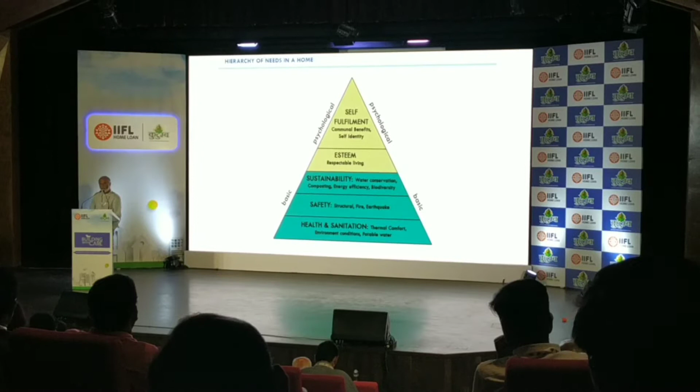The basic needs to be fulfilled when we build our homes or when we go to live in a new home. The basic needs being health and sanitation and safety. And of course, the assurances of what I call environmental requirements: water conservation, energy efficiency, and greenery around you. This environmental security is an essential need. If in the process of building we don't provide environmental security, then we are compromising our future. And this is basic need.

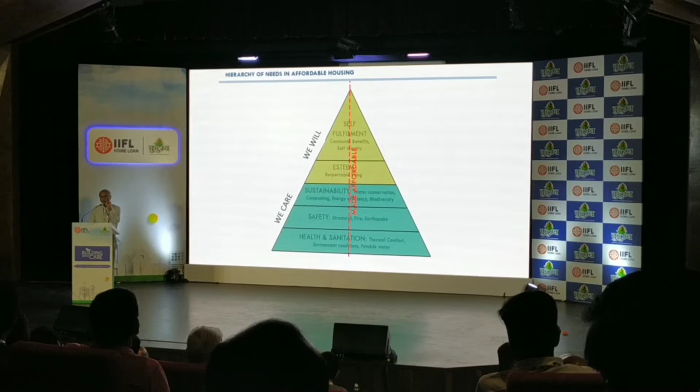But we need something more than that. We need, through the process of building and living a new life, a growing self-esteem and eventually self-fulfillment for all members of society. And let us say that providing sound homes for living in is this journey, making this a possibility. And making it a possibility at an affordable price today is our challenge. This is the work that we are really engaged in.

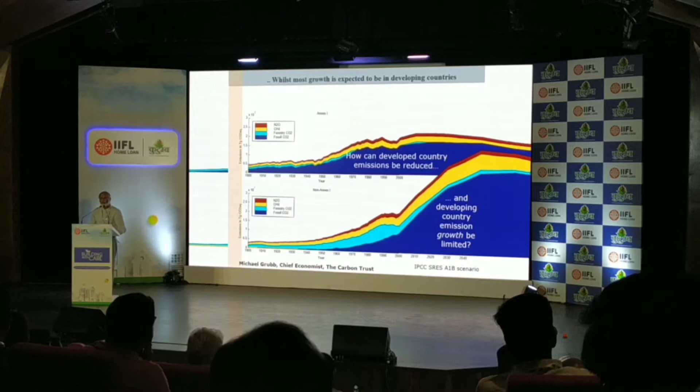Well, we had a glimpse of it in Monu's presentation just now. At the rate we are building in this part of the world, or in China, or in Nigeria, at the rate our populations are growing, at the rate we are building in cities, we as a nation are going to be a significant contributor to climate change, which is already on its way. So we cannot run away from this responsibility.

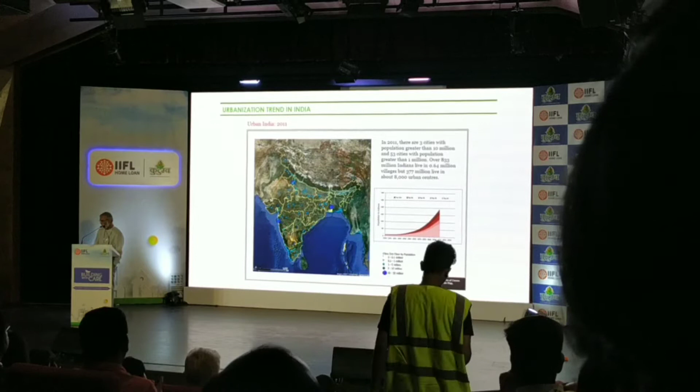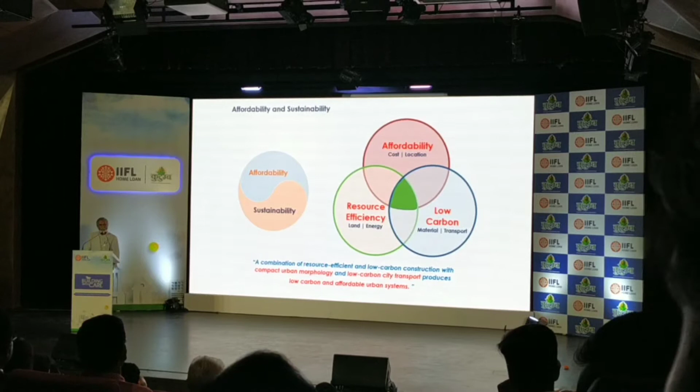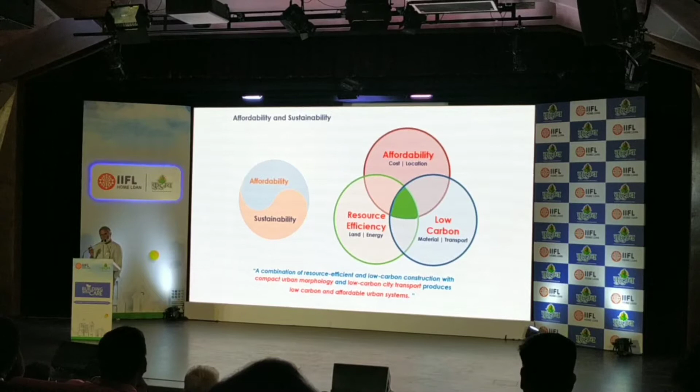And most of this is happening in our cities, dotted across the entire subcontinent, as you can see here. And these cities continue to grow. They become bigger and bigger. And the bigger they become, the greater the environmental footprint human habitation is going to have. I believe that to be affordable is only possible when you are sustainable. And if you are sustainable, you are likely moving towards affordability. I hope this will become clear as we move on.

Not only do we have to be efficient in the use of our resources, material resources and financial resources, not only do we have to produce buildings in a manner that produces less carbon emissions, either in their construction or in their operation, we also have to make sure that all of this is done at a price that our buyer with incomes less than 40,000 rupees a month can afford to pay. The green triangle in the middle is the zone of solutions. Just keep this diagram in mind.

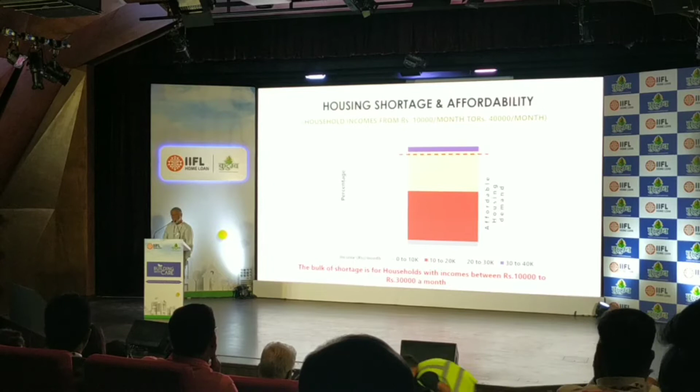Statistics have now made it very clear that most of the housing demand is in the low income sector. Most of it. The bulk of shortage is for households with incomes between 10 and 30,000 rupees a month. And if you scan the landscape of who's providing homes, you'll find that the big developer is not providing homes for this category, not at the moment. Self-build is also not going to do enough for it in the cities.

It is the medium and small developer in all the second, third and fourth tier cities, including the peripheries of the large cities, that is going to play the central role in overcoming this challenge. You are in the center of the growth of the nation. That's the point I really want to make.

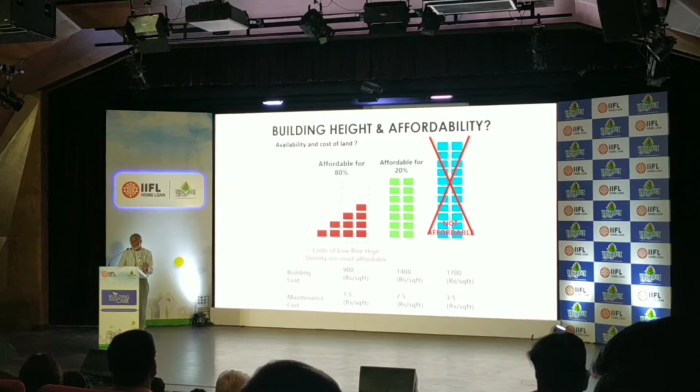Something else that's happening in cities, and it's a subject for Mr. Suresh, since he's over here. They say land is short, and so you have to go taller and taller. But we all know, it's common sense. As you build taller, you spend more. As you live taller, you spend more for living. Your costs for maintenance of the building and the operation of buildings go up. Lifts, pumps, maintenance, so on and so forth, just become more expensive. So actually, not only is tall building unaffordable to build, it is unaffordable to live in.

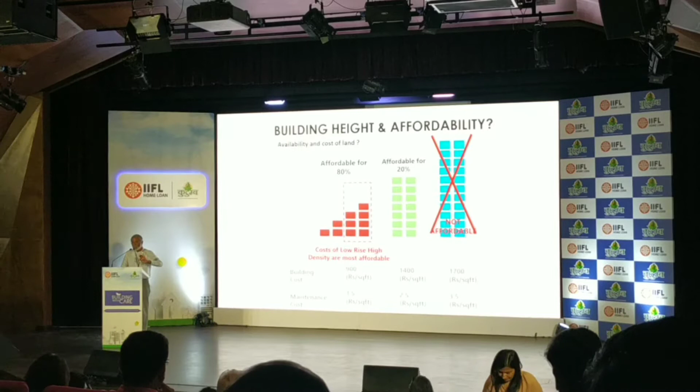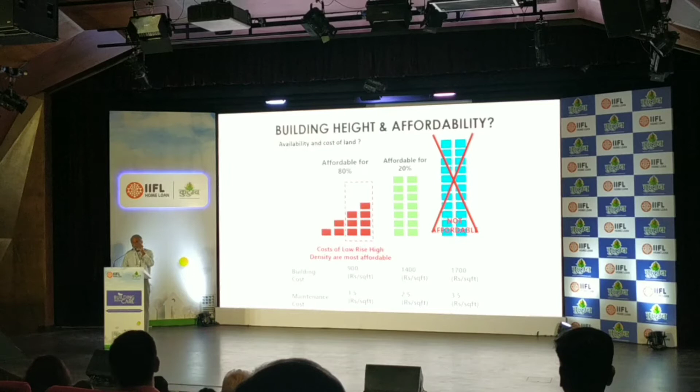And this is something that we have to really convey to our planners and our policymakers. Don't push the cities into a state where only tall buildings are possible, because if you do that, 80% of the population will not be able to afford to live in the cities, and that's no way of living. Most affordable is 3, 4, 5 stories high, and 80% of our citizens can afford it.

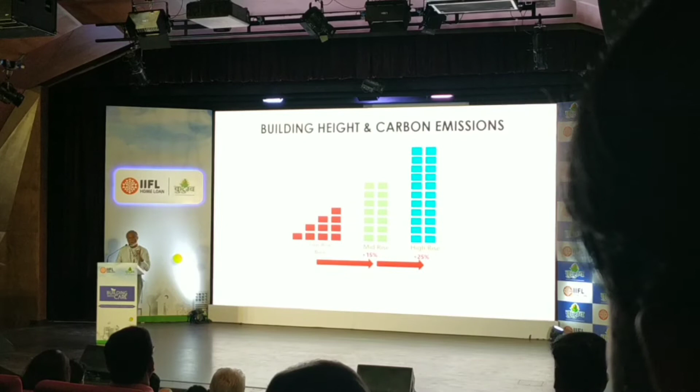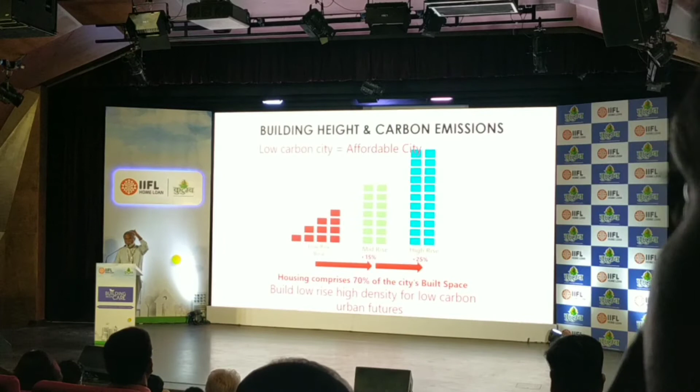We also find that as you build taller, you consume more electricity in the operation of the buildings. As you grow taller, you consume much more steel in the construction of the buildings and other materials that cause a greater emission. They have greater embodied energy, therefore cause much greater emission of carbon. So, to build low is economical, not only in money terms. To build low is also more environmentally friendly. Sustainable is economical. Sustainable is affordable.

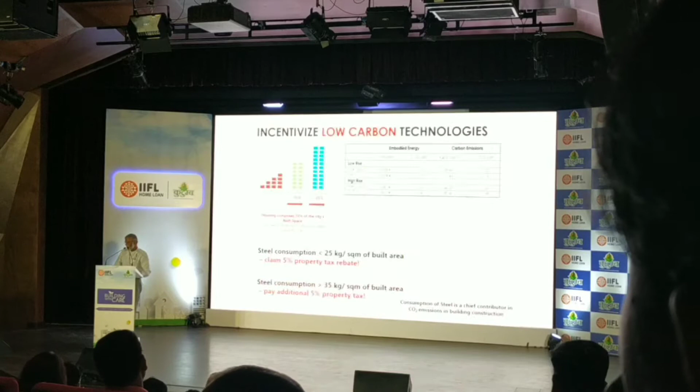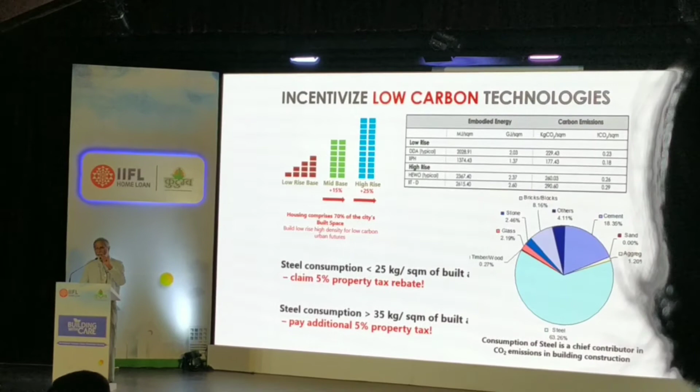We found that approximately 60% of the embodied energy of construction, that is, the energy used in the production of materials for the construction of a building, 50 to 60% is attributable to the consumption of steel in the building.

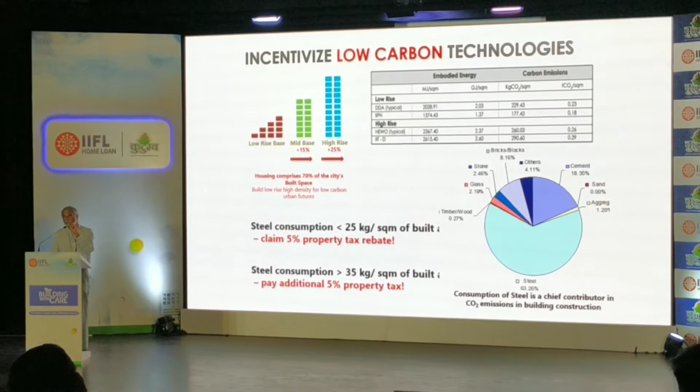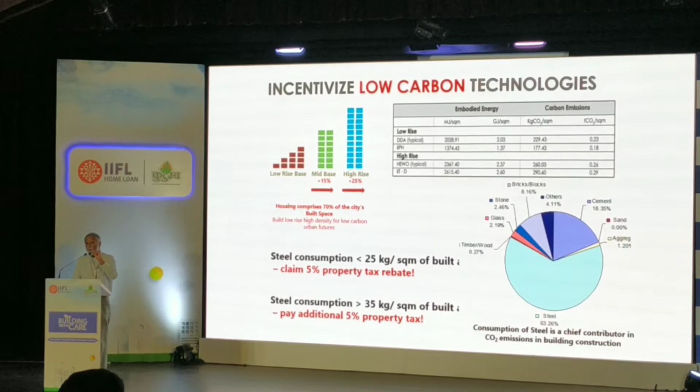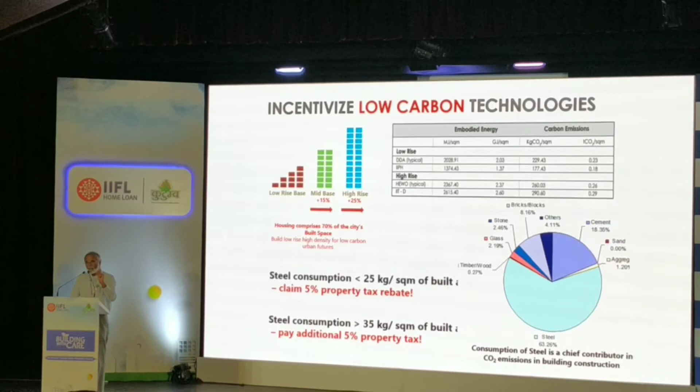What we found, even if you're designing for earthquake zone 3, up to 4 or 5 stories high, you can manage at 25 kilograms of steel per square meter of built space. 25 kilograms, if you do careful design. But what is the norm in industry? 3.5 kg per square foot, they say. If you go taller, it becomes 4. If you go taller still, it becomes 5. But keep this target in mind. Intelligent structural design and configuration of building can do much less harm to the environment because you can design it with less steel. 4 to 5 stories high gives you the best results.

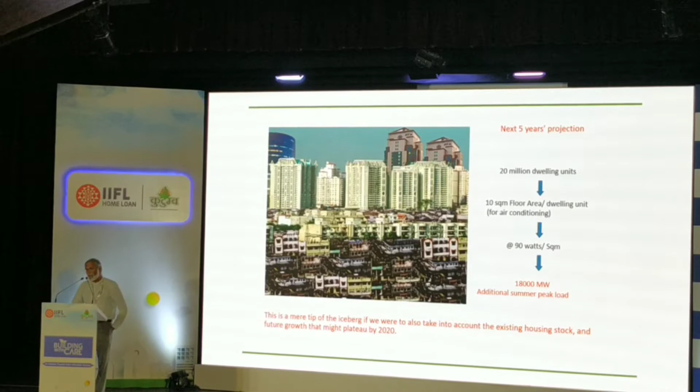So that's about embodied energy, very quickly. Another thing, as we go into looking for better comfort in the home, even if I'm moving into a home today which has no air conditioning, 2 or 3 years down the line, at least one room is going to be air conditioned. Maybe it won't be used all the time, but sometimes it will be used. And then 10 years down the line, maybe more air conditioning will be required. At least I look for air conditioned comfort, if not for air conditioning, right?

So what do we have to do today? Even if air conditioning is not going to be assumed to be a part of the building, we have to design in such a way that the need for air conditioning in the future is reduced. Because if you don't do that, and as you continue to increase the construction of buildings at such an enormous rate, you're going to ask for so much energy just to meet the air conditioning demand of our urban living.

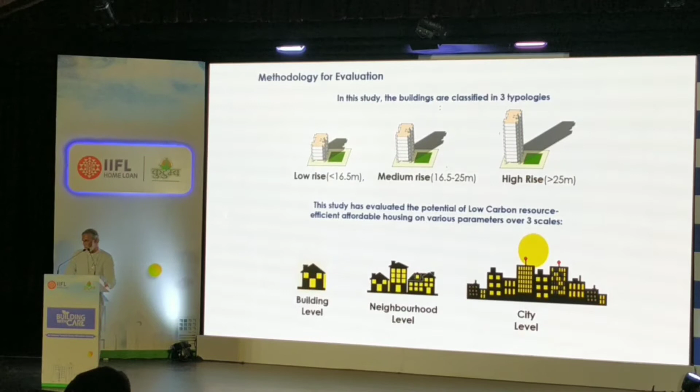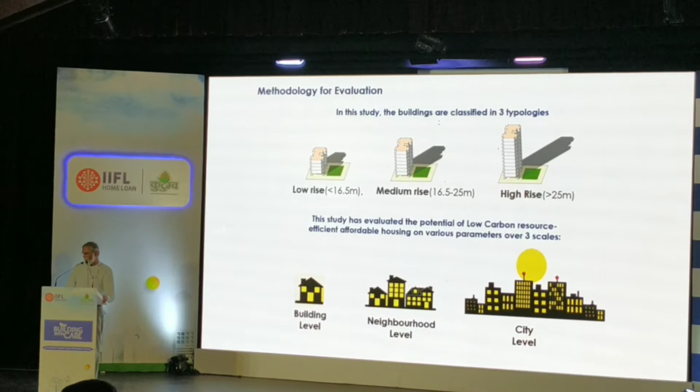So we did this survey to establish that in middle class homes, progressively, 60% of the bill of electricity is attributable to air conditioning itself. 60% of it. You could go to any part of the country. We did a comprehensive study of 4 to 5 story high housing, 8 story high housing, and then taller housing, with actual data taken from buildings that have been built. And we came to this interesting conclusion.

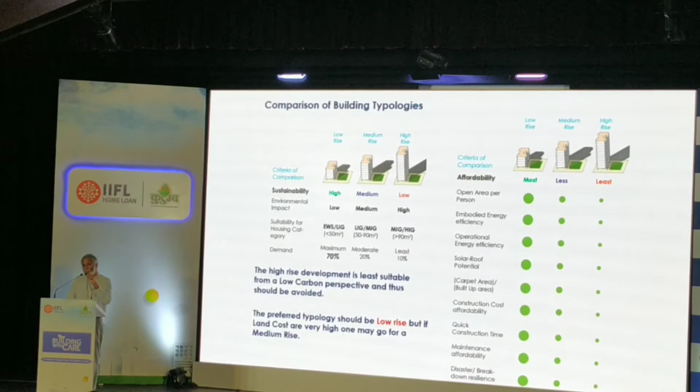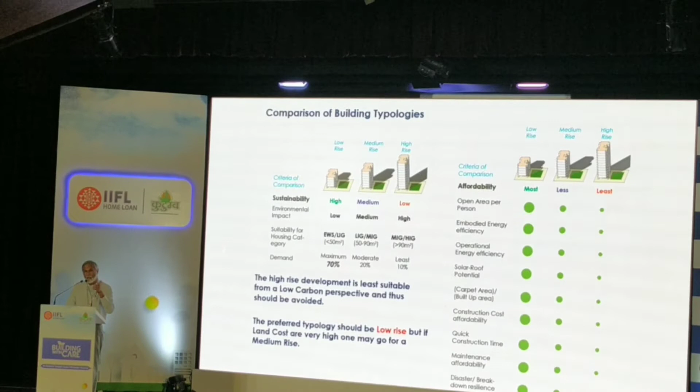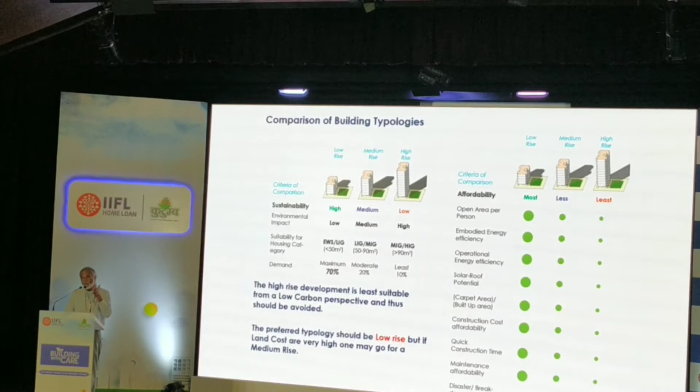We found that in the overall development, if you consider the terraces and the balconies as also accessible open space for the residents, you get more open space per person in affordable housing if you are 4 to 5 stories high, and you get less as you go taller, and even less as you go taller still. So open space provision, which is an integral part of the home environment, actually improves even when you achieve the same densities. Embodied energy of 4-story housing is 30% lower than 8-story housing. Operational energy is much lower still. It is about 20% of a tall building.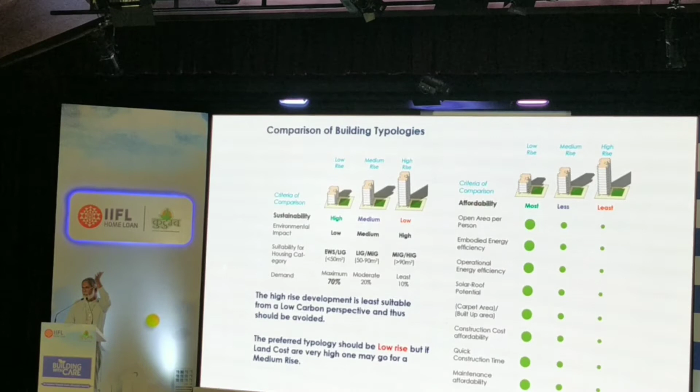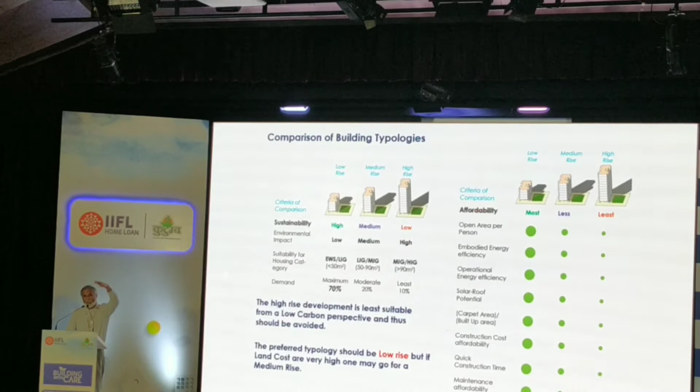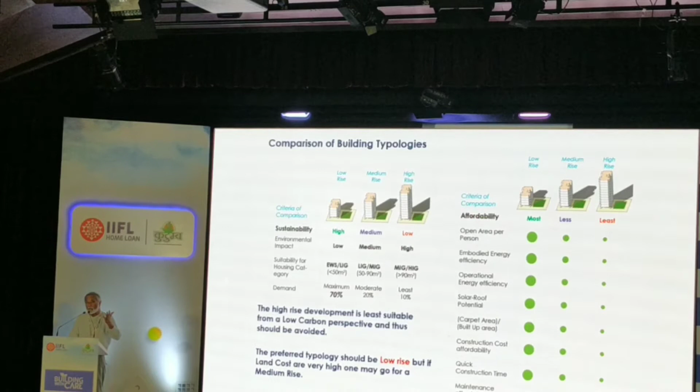An incredible possibility that has arisen is that if you build 4 stories high, you've cleared the roof line. You've cleared the tree line, just at the tree line. That entire roof is now available for you for solar photovoltaics. As the government program and the technology and the financing structures, business models for solar photovoltaics become more and more accessible, what we have found is 85% of the energy demand of simple living in 4 stories is met by the sun falling on the roof on an annual basis.

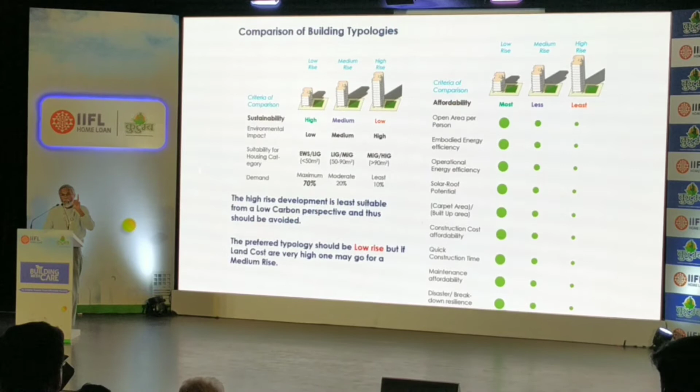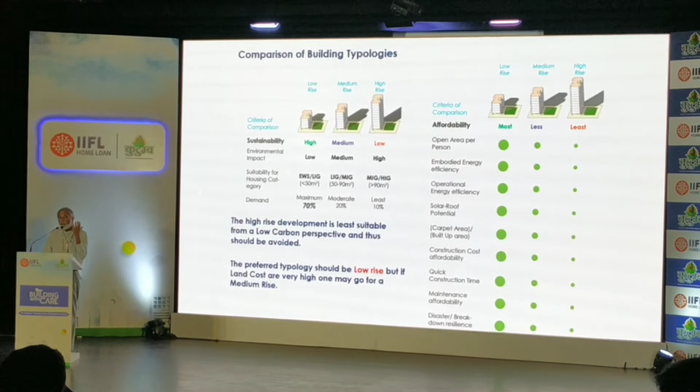You can truly go towards net zero city life if you stick to 4 to 5 stories high. If you go 8 stories high, that potential drops. If you go 12 stories high, it will never be achieved. So if you're talking about cities of the future that are free of carbonaceous fuels, this is where the solution lies.

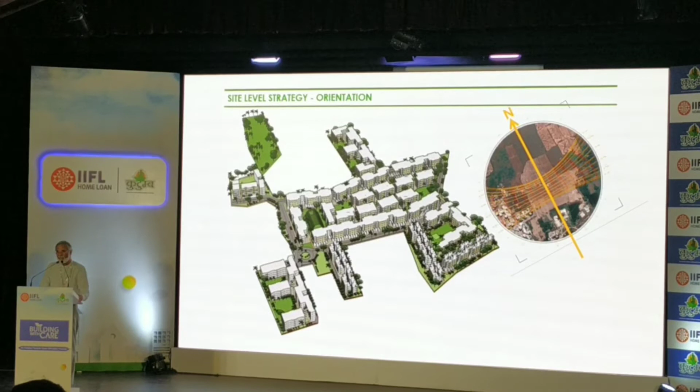Simple things about which way the houses should face. Don't face them directly into the sun. Don't face them directly into east and directly into west as much as possible. Keep the heat out.

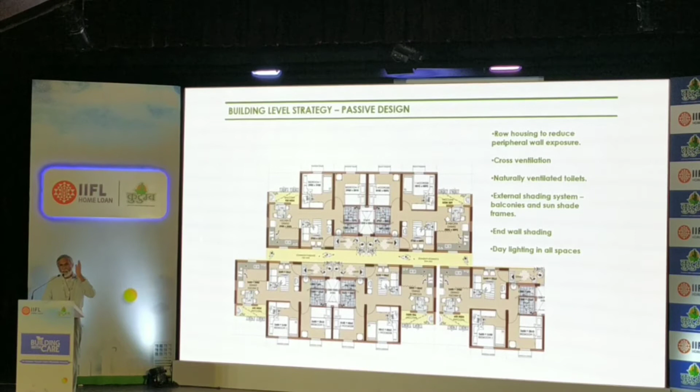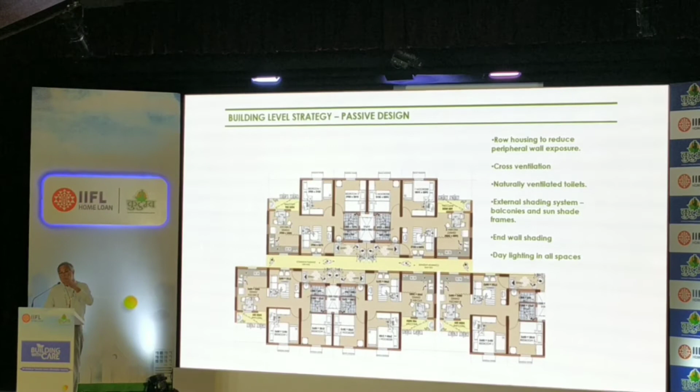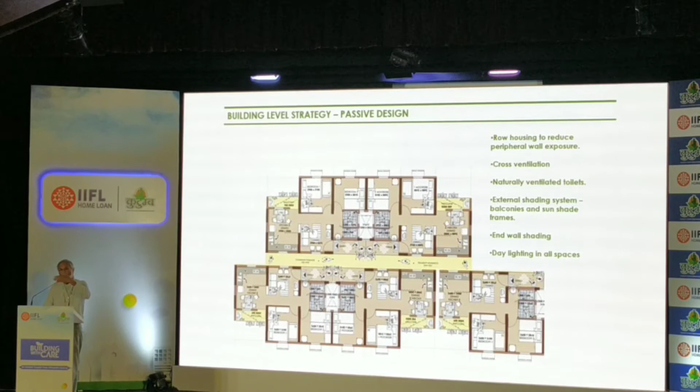Build in such a way that the external wall area of the building is limited in relation to its plan area. Use a row housing principle or similar principles of design. It brings down not only the construction cost, it brings down the area of the walling on the external face, external finishing, right? Doors and windows, and the exposure of the inside space to the heat or cold of the outside. In every sense, it is more efficient. It is more environment friendly. It is also less expensive.

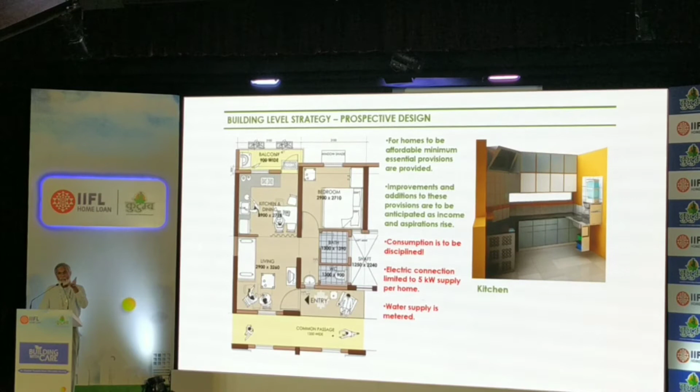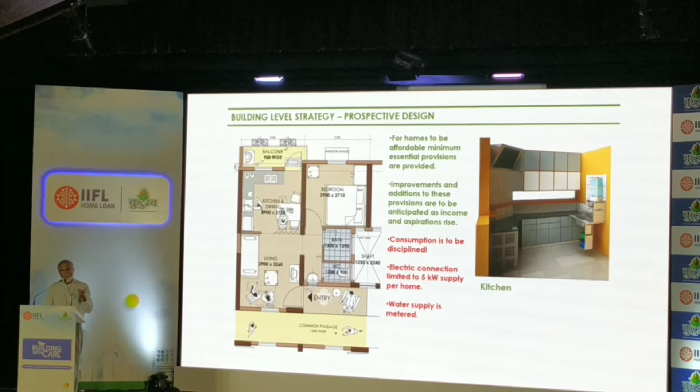And you can design in such a way that what you occupy today can be varied for the needs of the future. Again, very careful structural design can allow you to increase the size of a house by adding the neighboring house to your house, or the neighboring room to your house, or selling out your room to somebody who's a neighbor, etc. Because the structure is going to stay for 50, 60 years, whereas the internal living space is going to undergo change as incomes improve, family structures change. Make the buildings future-proof, and this can be done at low cost.

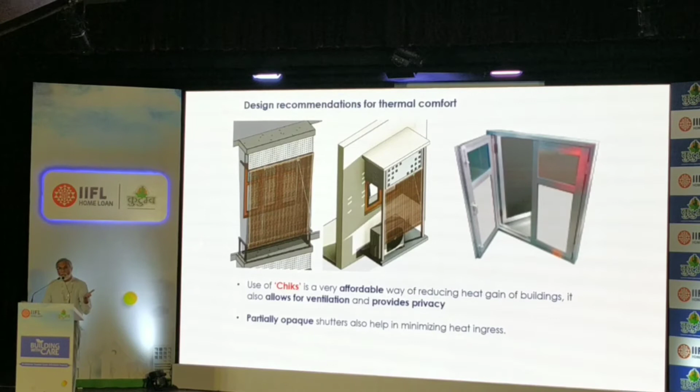Extremely important. Do provide for external shading. Stop the sun outside the window. Don't let it come in. If you're going to let it come in, it's going to heat up the house. Simple ways that you see. On the right-hand side, you see a very interesting solution.

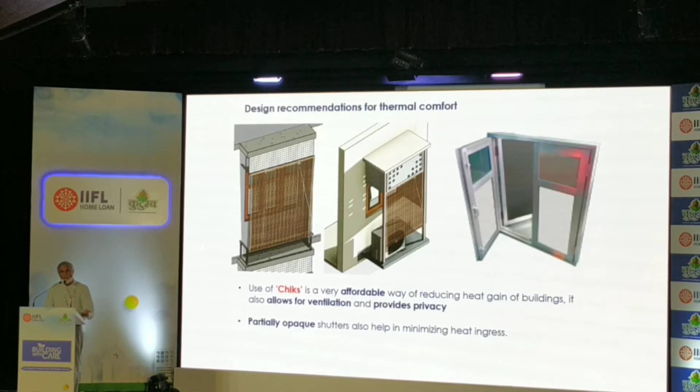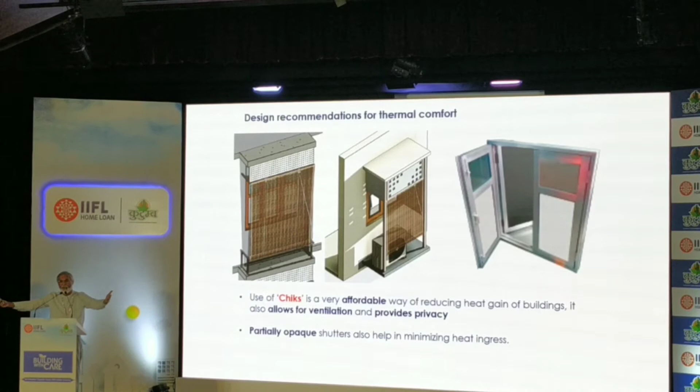If you go into the countryside, go into the old cities, the old days, you used to make windows out of solid shutters. And when glass came in, a little bit of glass came in at the top. When it is pleasant outside, you simply open the window, let in the air, let in the light. When it is very hot outside, you don't even want the sunlight. And there's enough sunlight outside when it is very hot for a little bit of glass to do the job. So, a simple way of shading and keeping the heat out.

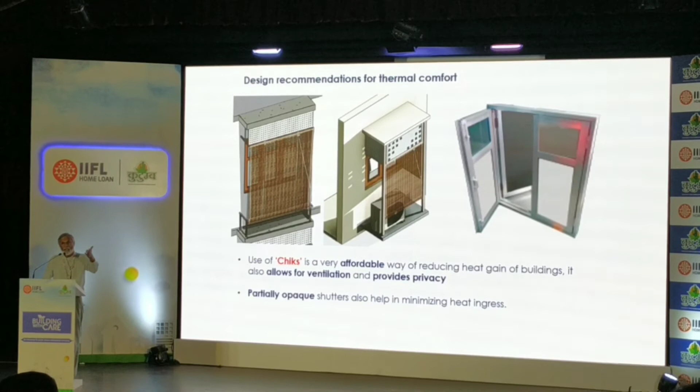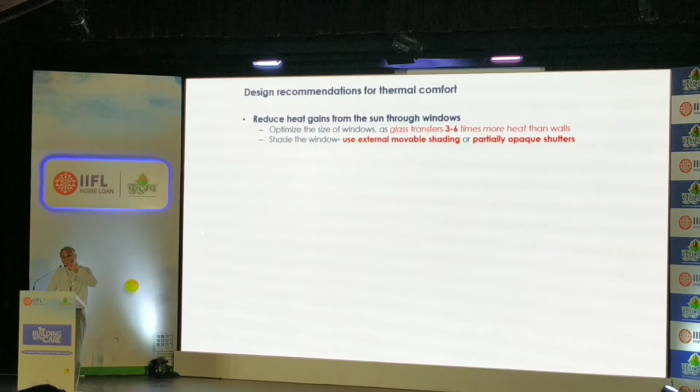But if you want more view and more contact with the outside for space or whatever else you might want, do provide an external shading system. Goes to balconies and to every other element which is open to the outside. So, very important, to reduce the demand of air conditioning in the future, reduce heat gains from the sun through windows.

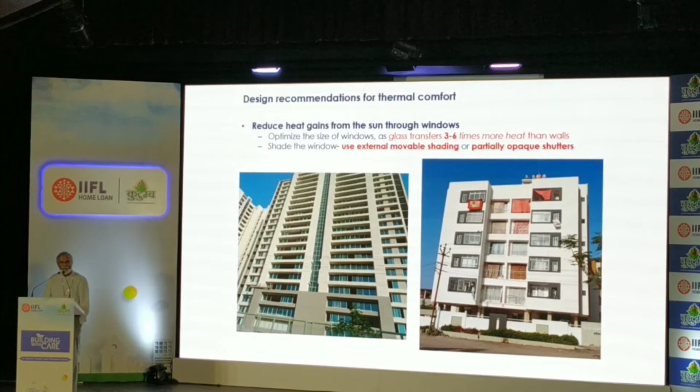Don't do this. Don't think you are up with the fashion. Just don't do it. Because this is what the occupant ends up doing. Covering the window with a piece of cloth outside because you got it wrong in design. Okay? I think in Bangalore, this is the worst fashion trend that I have seen. Increasing glass just to make life uncomfortable. I don't see why people do it.

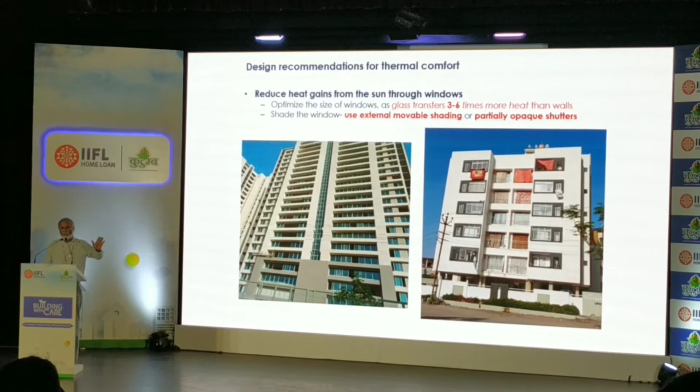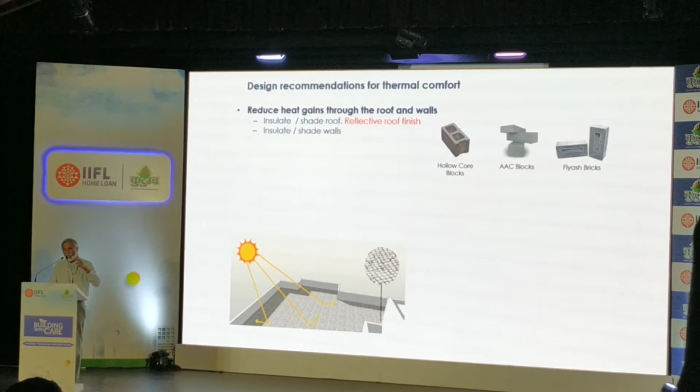Now you can have walling materials that give you better insulation. These are all available. They cost you perhaps 5% more than old traditional materials, but they give you much better environmental results. And they are lighter than the traditional materials. So instead of solid concrete block or solid brick, if you have hollow block or lightweight concrete block, you get the compensatory gain in the design of the structure because the structure has to be lighter.

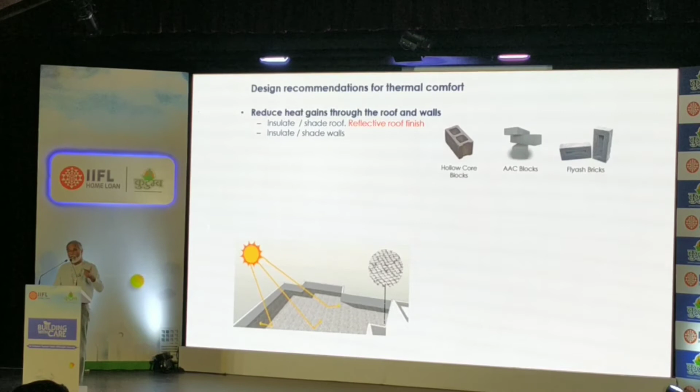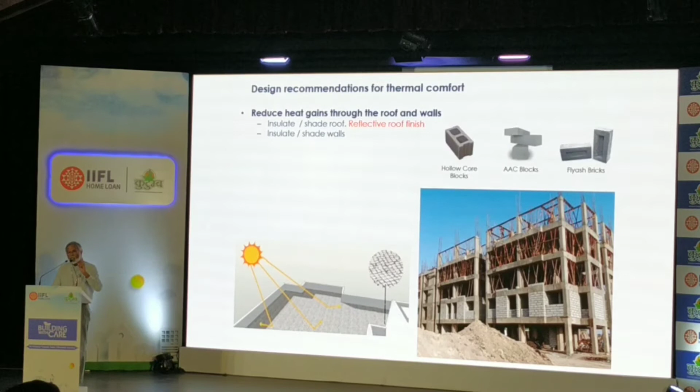Insulate the roof. Roof insulation is an absolute must, and it doesn't add more than 0.5% to the overall cost of building. But what it means is that you can sell the top floor in the city of Jodhpur, not talking about Bangalore because here the climate is not so bad, but any hot climate, you can sell the top floor at the same price as you can sell the middle floor. Because people have got to know that the top floor is the hottest floor. Insulate the roof. Insulate the walls.

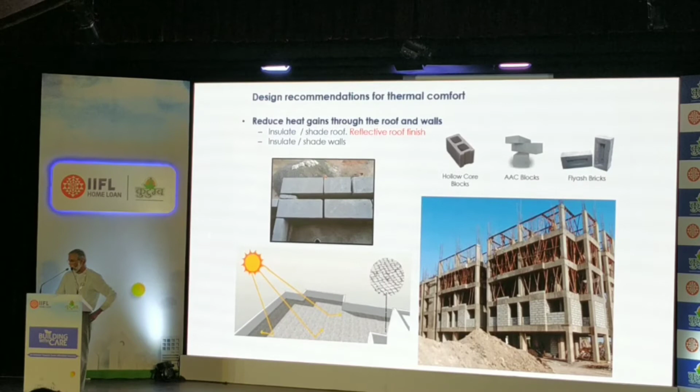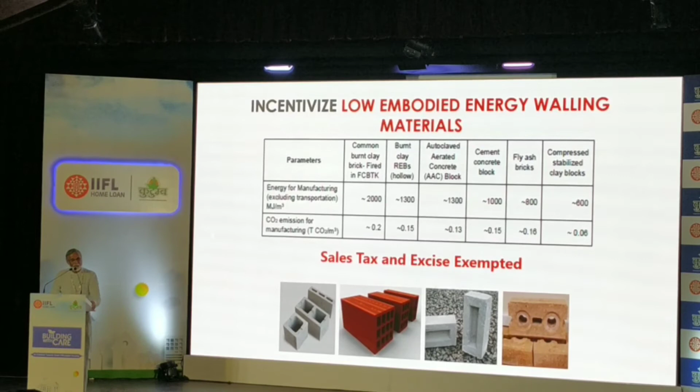Here is for policymakers. Remove GST on these materials, sir. Okay? Make it affordable. Make environmental design affordable. Isn't that what our job is as government? Total profitability, comprehensive profitability. Not only GST counting the exchequer. No. I think we've got to really move policy in that direction.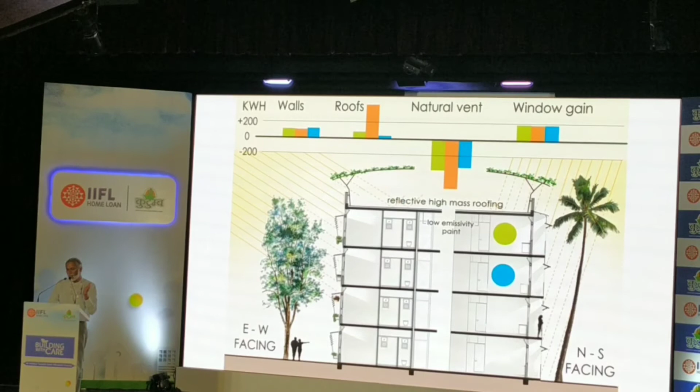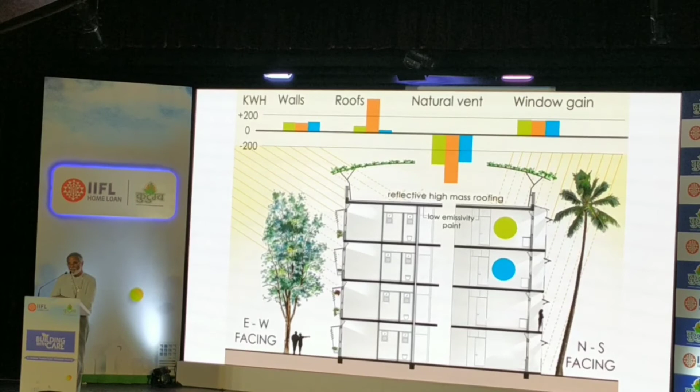Integrate design overall, whether it is the windows, whether it is the roof, including the plantation outside. Because if you're facing east and west, plant the tree on the left-hand side that produces a curtain outside when the sun is setting or rising. If you're facing north or south, plant the tree on the right-hand side, which is like an umbrella, cutting out the sun from the roof, from the upper levels of the sky.

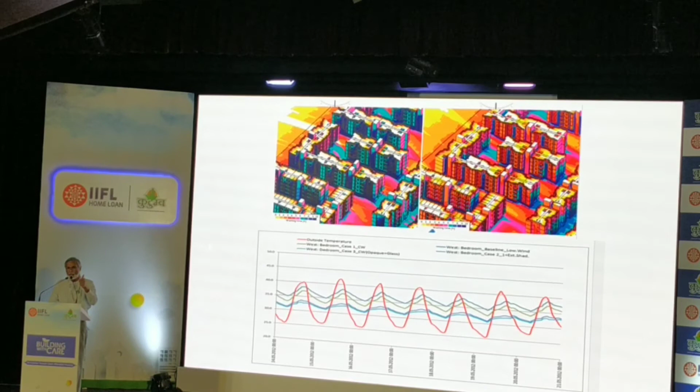We have done intensive simulations on the thermal performance of buildings that can be achieved by what we call passive design. No air conditioning, only orientation, shading, some insulation on the walls, reducing the size of windows, insulation of the roof, 4 or 5 things, and being able to open the windows sufficiently for night ventilation to cool the building down.

And we have found that we can get 80% of the time in most climates across the country comfort without any need or demand for air conditioning. And all of this is achieved with practically no increase in the cost of construction. No increase.

So here it is. Today I don't have an air conditioner. Tomorrow I have an air conditioner. But what we worked out was a 0.75 ton air conditioner, window unit, installed on the upper level, with a ceiling fan that runs slowly, is all that you need in a room, in a common bedroom.

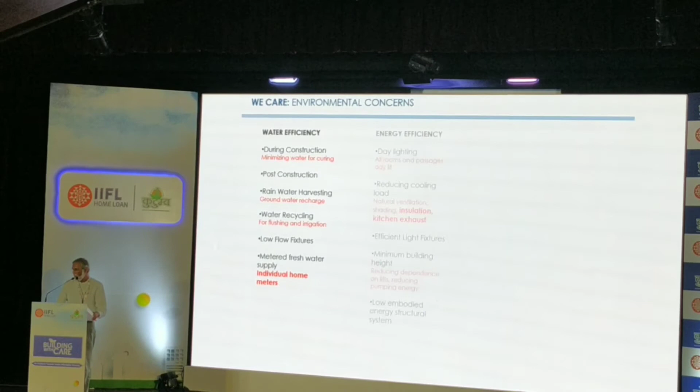The industry is selling you 1.5 tons minimum. Alright? And it's less efficient because of the distance between the outdoor unit and the indoor unit. But this is all that you need in the worst climates. Well, 3 major goals. I won't go into the details except to touch upon the maintenance and regulation of services infrastructure.

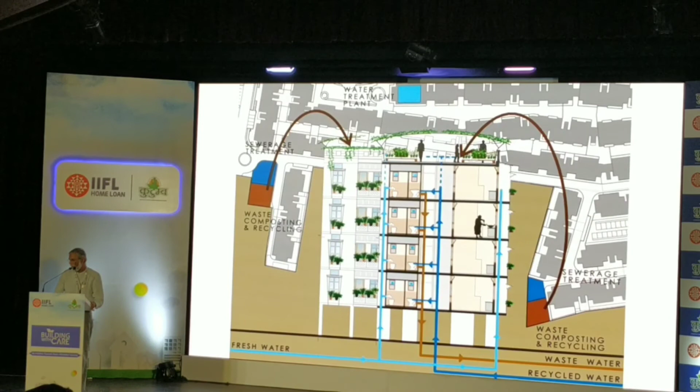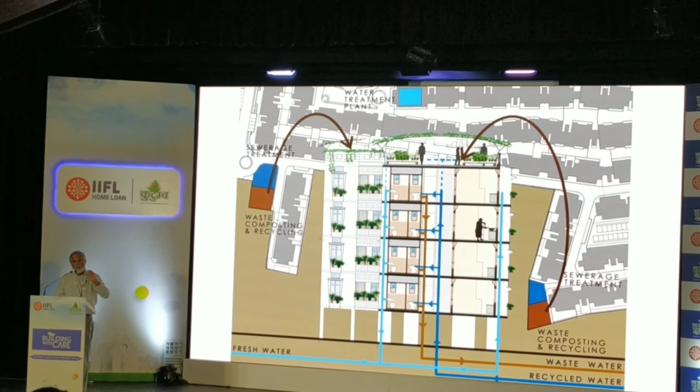What we found is that once you have about 200 homes, collecting the waste, treating it on site, recycling the water for flushing and irrigation becomes affordable. 200 homes. At that unit, these technologies are now available, they are affordable, and they are very reliable technologies. That's already been done. For very large projects, environmental controls require you to do that. But for smaller projects, it is still doable, and then you qualify for the green rating on which the financing is dependent. But it's doable.

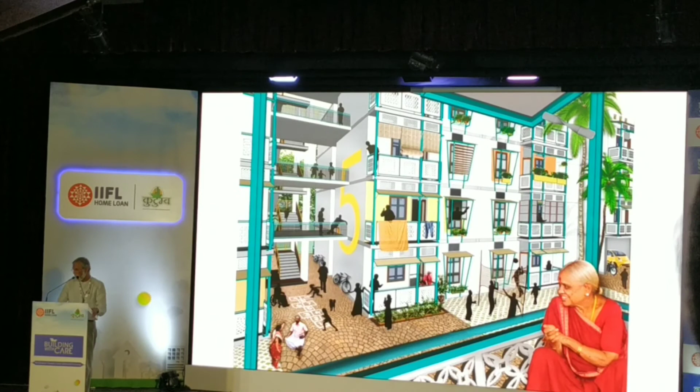Things will never be constant for all times. They will keep changing over time. Buildings must be designed to accept change, to accept gradual improvement as people's lives evolve. Here's something that's been built. See the shading frames outside? We haven't provided the shading yet, but people do it. It's very easy to do.

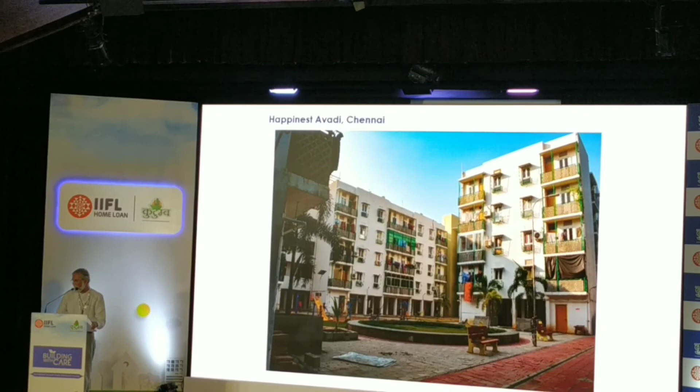Here you are. And it's an electricity supply. All that is possible only because you're taking the advantages of community living. You're sharing the cost of your infrastructure together, which you cannot do if you build independent homes. And that's the possibility that we are looking forward to.

Many ways of building very economically. New technology on the block. Interlocking hollow block, which can be assembled very quickly. You can lay one floor every week. Minimum reinforcement for 4-story high, 1.9 kg of steel per square foot.

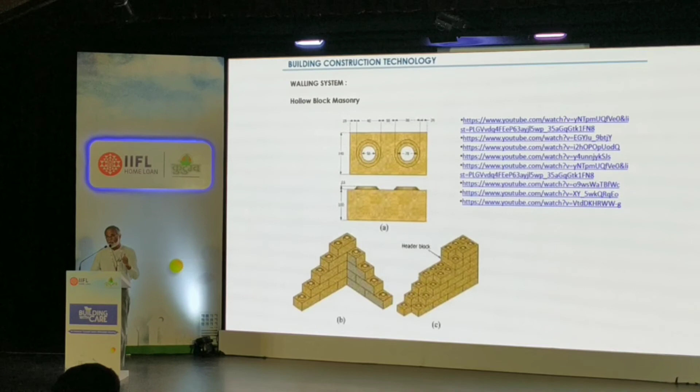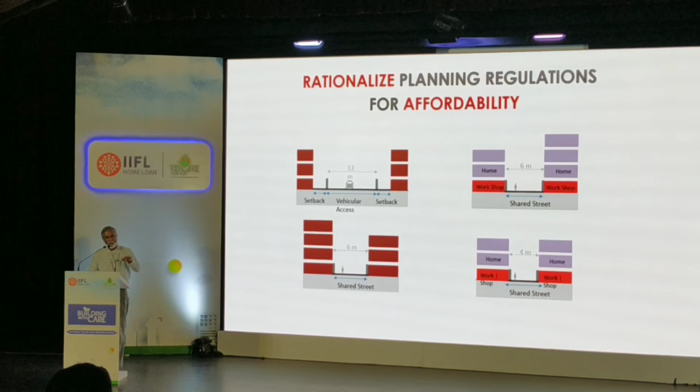Again, for our policymakers, if you look at planning regulations, there's an awful lot of land wasted because of the reservations required by planning regulations, which are not required actually for living. And because of that, you're not able to achieve the densities. And if you're not able to achieve the densities with 30% ground coverage, you end up having to build taller, and then you're out of the range of affordability. Rethink that. You can make more affordable homes at lower heights, at higher densities.

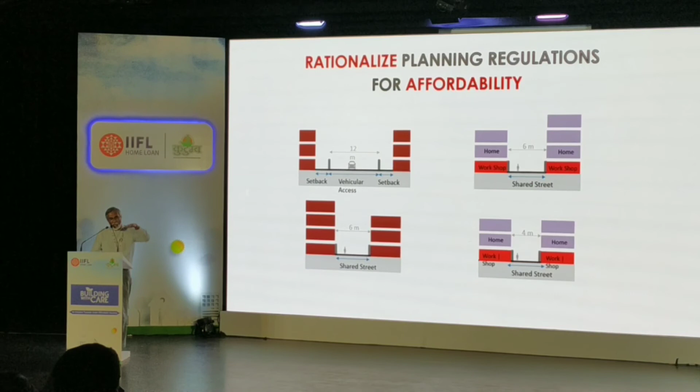Mixed land use is another such question. Allow people to open shops on the ground floor if it's convenient for them, so long as they don't mess up the space. Have some rules about that, but don't have any segregation of shopping from residences.

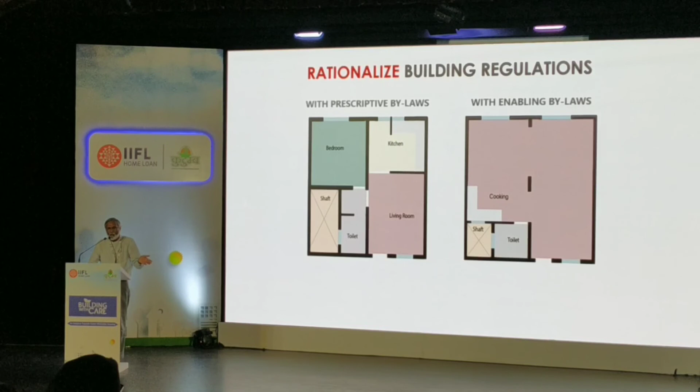Internal spaces, my God, those rules are the most insane. They don't leave the occupant any freedom to do whatever they like. They don't leave the builder to allow freedom to the occupant. Why not? This is something that needs to be rationalized. And I think, Suresh sir, you're on to this task, and we look forward to some results. This helps all of us. It helps all of us.